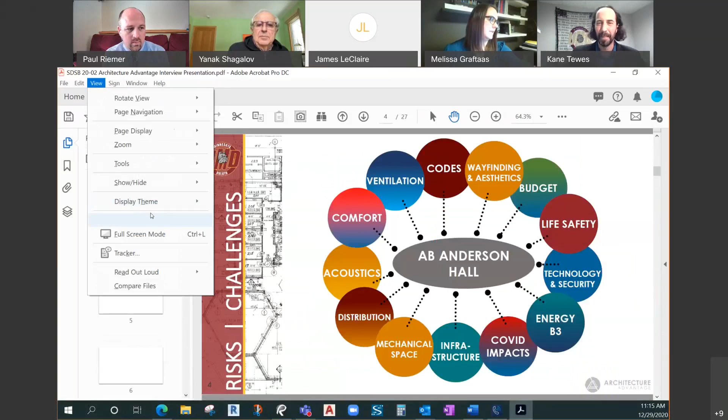I just lost my presentation. Thanks, Melissa. While you get it going, one second, Kane. No, I can speak to just one item. Yeah, let's get back. There we go. Is that showing back for everybody?

I'm just going to leave it on the screen if that's okay. Fine. We have laid out on this slide the risks and challenges that we identified in our proposal response, and that's how we've put together our presentation for you here today. We prefer to look at these as opportunities for the project. So you'll see us throughout the rest of the presentation referring to these risks and challenges that we developed. Renovation projects such as this do bring a higher level of difficulty than new construction, and we thrive at those challenges for a project like this.

So Kane is going to start us out with wayfinding and aesthetic opportunities. In our proposal, we identified, along with this list that Melissa and I put together as a team, 7 items that we thought are critical to this project.

Number 1 being creating a healthy building, probably in this order. Number 1, creating a healthy building. Number 2, updating the existing life safety systems. And then number 3, making this an experience, enhancing the student experience.

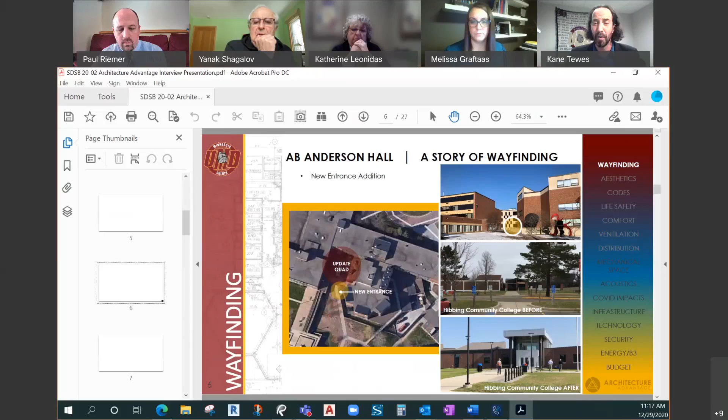So as part of this new entrance, there's a possibility of updating a quad. There's an existing quad that's flat, has grass, even has some playground equipment in the northwest corner of it. But like we just did at Ordine Court, we created a nook and a cranny for students to possibly put some benches in there and some landscaping, so students can actually enjoy the outdoors, which we can do in Duluth.

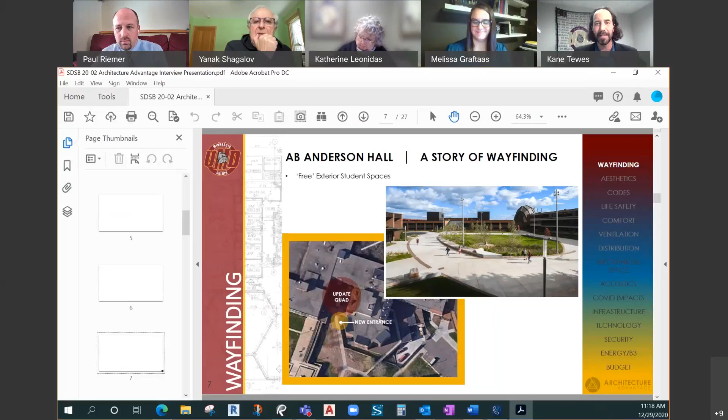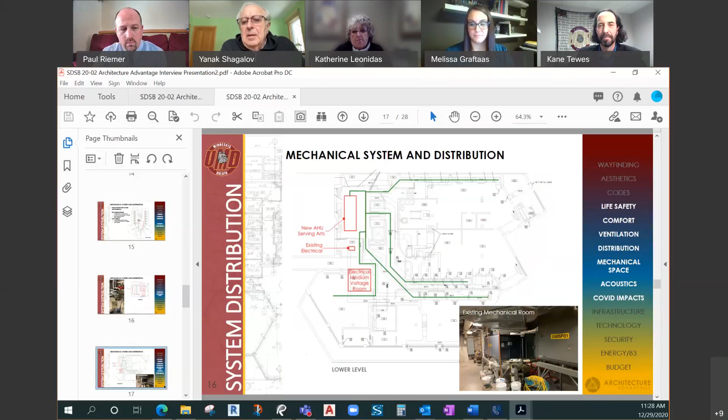Taking a step out to look at campus infrastructure, we have long experience with the campus chill water system, the MSML system, which is multi-source, multi-load with 3 generation points and chill water pumps in each building. You really need to understand how to properly size those pumps, or it will have a domino effect on adjacent buildings.

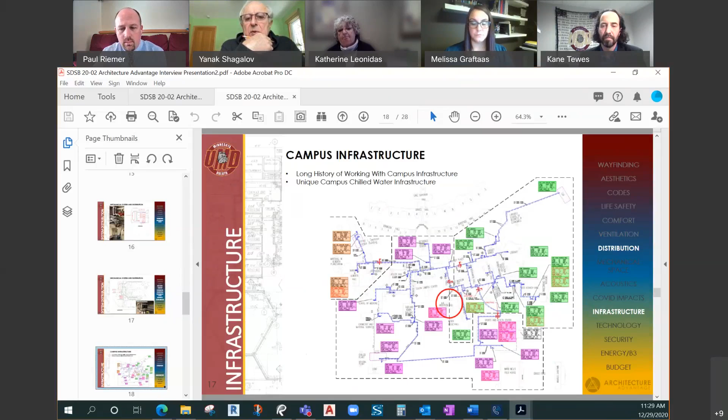Zooming in to look at specific impacts from Tweed through Humanities to A.B. Anderson Hall, the existing chill water piping through Humanities isn't sufficiently sized to feed the new building. Our proposal is to remove that 5-inch pipe and install a larger one to feed A.B. Anderson, Humanities, and Weber, sized for future Humanities needs.

The area underneath Tweed only has about 4 feet of crawl space to work with, so it won't be easy, but we've done piping modifications in that area before, so we understand the challenges.

Looking at the steam side, there's a steam main with a high pressure reducing station down in Humanities that feeds into A.B. Anderson. We'd have conversations with facilities about whether to keep that in the same location or move it into A.B. Anderson Hall to do the reducing there. That station needs to be upgraded to accommodate the new building load.

Finally, a lot of the campus steam condensate comes through Humanities via the existing steam condensate room, so evaluating the size of that and making sure we're picking up the rest of the campus load is key here.

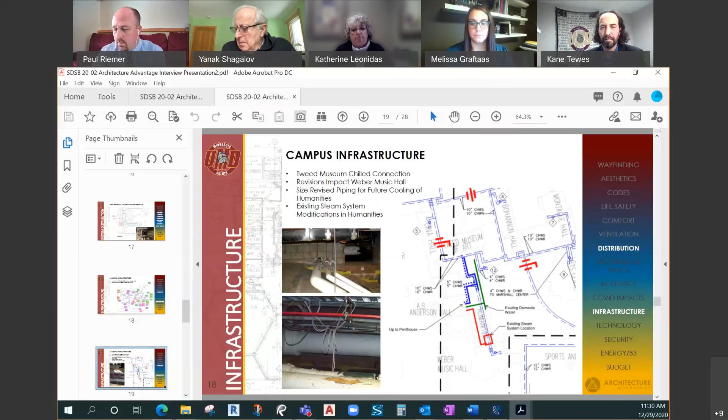Similar to the mechanical campus infrastructure, we can't forget about the IT infrastructure. This will be a critical aspect of the project.

Leave it to the guy who can't get the camera to work to talk about technology systems.

In all seriousness, when students come back and this building is full, each will have 2 or 3 connected devices needing network access, so we need a robust infrastructure to support that. Through our work with IT staff on past projects, we understand we'll have dedicated IT closets on the floors. Collectively, we're all going to be fighting for space, with a lot of program crammed into the core of this building to make it work, as we've done in the past on campus.

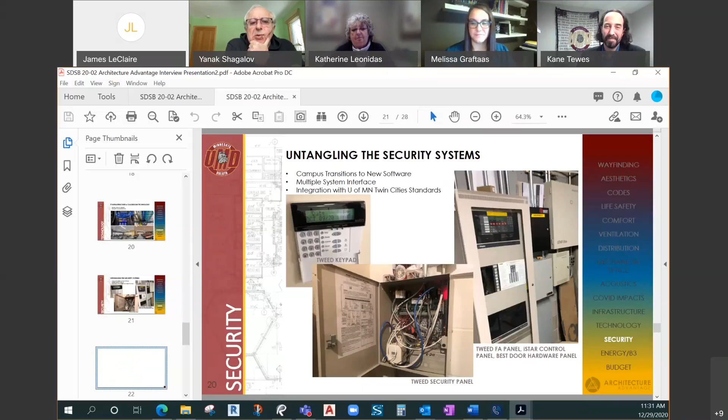We have the option to opt into those. We think the streamlined phases of submissions would be valuable going forward.

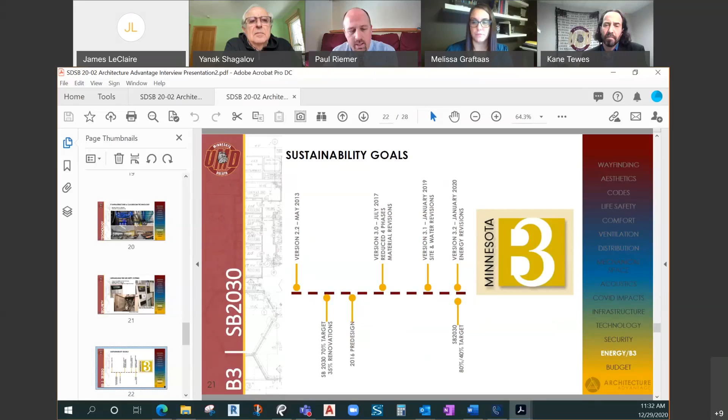And then we have another slide dedicated to the SB 2030 target. We're going to probably have a sliver of new construction for that penthouse area, but will primarily be a major renovation. Because that pre-design was before 2020, we're grandfathered into the 40% energy and carbon targets. We've shown that up there, the energy target, in the upper right.

In terms of an energy usage intensity, EUI, we expect the target to be about 94 site kBTUs per square foot. We expect to meet and surpass that based on our experience on past renovation projects and based on the mechanical system types we're suggesting here, along with some other strategies in terms of heat recovery and demand controlled ventilation. We really think we can exceed that, even given some of the other constraints on the project.

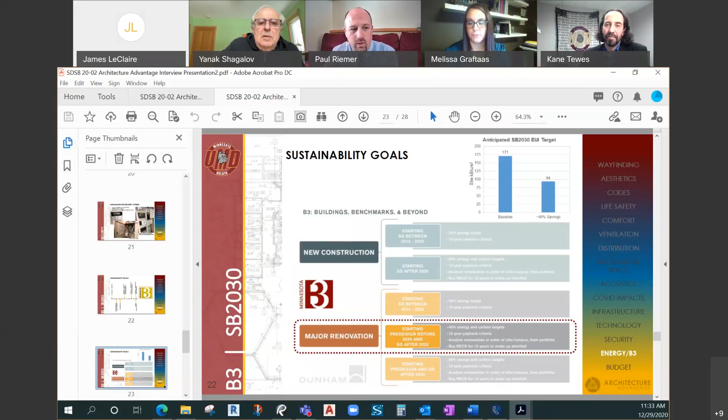We do have that full air side system replacement, as well as full or nearly full lighting system replacement. And Paul and I have worked on numerous B3 projects together, so we've filled out the forms, and we've done this again on a renovation project as well.

Not glamorous by any means, construction administration is where all of our design and hard work comes together. We're experienced with CM at risk, and especially on the UMD campus. When I say we, Dunham and I have worked on Montague Hall, which is a CM at risk with McGough Construction.

What's great, and usually when we've done CM at risk, it isn't until after DD that the CM gets on board. What I like about this process is, as we're in schematic design, we'll have the CM there to help us navigate budgets as we move along.

It'll help us hone the drawings a lot quicker and get a more complete set faster. And just in terms of construction administration, I pride ourselves on it. We're a very accessible team.

Usually we're helping the contractor out, and they don't tell us things until they're going to be pouring concrete the next day. So we have to get out there immediately, which isn't a problem. If we can make it, we're there, and typically we are. And it's not only beneficial to the university, it's beneficial to the whole team.

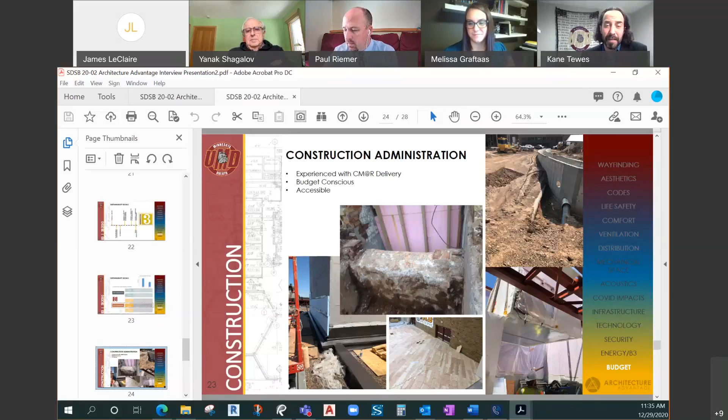We are the team ready to start diving into this project for you to accomplish your design, schedule, and budget needs. You will not find a more dedicated group that's committed to project success on the UMD campus, and we're very proud of that. The consistency that we provide in both our experience and expertise in renovation design, in this building, and on campus will provide project success for all.

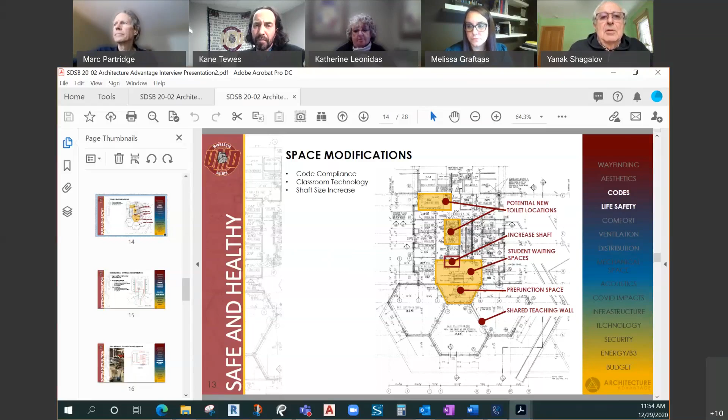Expansion of the penthouse creates several problems structurally, and we don't have a structural engineer presenting, but you might delegate this concern. First of all is additional snow load - drifted snow on the roof - and very likely this building is not designed for drifted snow at that time, in 1970. Second question: the floor load for the penthouse requires higher loads than a regular floor or roof. So these two questions need to be addressed, and it will impact the cost too.

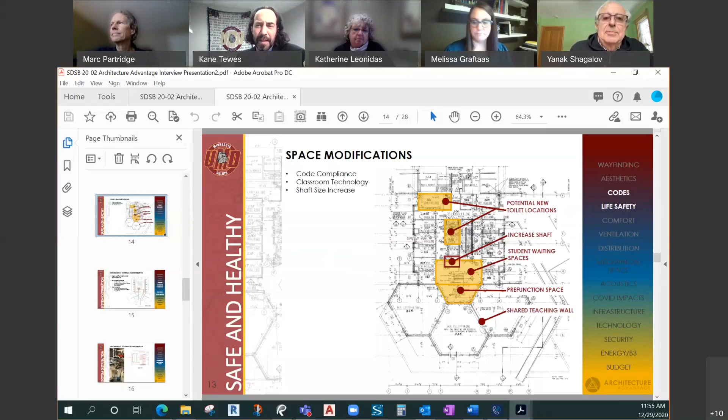So just make sure - Melissa, I don't know if you could flip to that next slide with the penthouse.

Before the presentation, I did talk to our structural engineer. One of the benefits of this building is it's steel framed, and the second benefit is we're gutting it, so if there are any modifications we need to do, all the steel is going to be exposed. John Almett was talking about how it's going to be fairly easy to upgrade the steel if needed to make sure the floor loading works. I understand your concern about the drift loading.

Okay, well, go ahead. We have 38 seconds left, so with that...